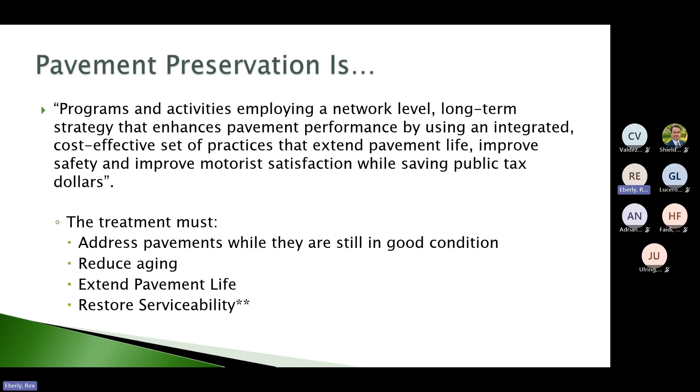The treatment we call a preservation treatment must address pavements while they're still in good condition, reduce aging, extend pavement life, and restore serviceability, make them a better road, make them drain, do whatever they need to do. I'll get on my little soapbox here. What I've learned in the past 4 years with NCPP and going out into the states is that addressing pavements while they're still in good condition...

My goal in this industry for the next 3 to 5 years I have left is I want to get people addressing pavements while they're in good condition, instead of waiting until, I'm sure you all have had to do a chip seal on a road and you're going, my goodness, this road is way worse than what a chip seal is going to fix. We're going to be back here in 2 years. I get that states have to do what they have to do because of budgets. But if we could have done the chip seal on that road 7 years earlier, then it truly would have been pavement preservation. So I'm off my soapbox.

So let's define that definition. Number one, the New Mexico Department of DOT, or any city, township, or county, they have a network of pavements, and preservation needs to cover that entire network. That's urban pavements, rural pavements, airports if they control the small airports in their network. If you're a city and you have alleys, parking lots, that's part of your network, and for your taxpayers, to do what you're supposed to do, you need to work it as a network. That's our asphalt, our concrete, and even our gravel or dirt roads, which, if I remember right from traveling New Mexico about 15 years ago, I think there were actually a few state routes that were still not paved, which is interesting.

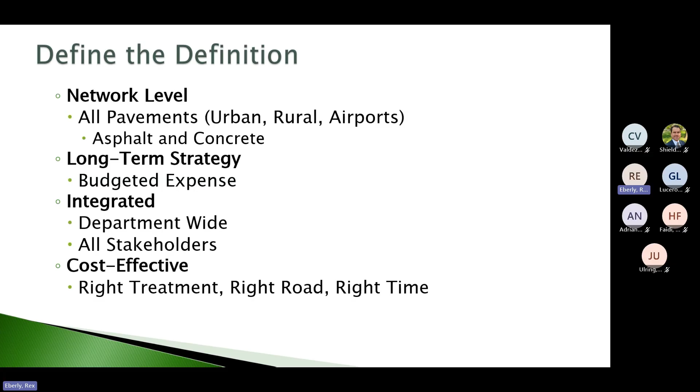And we want to keep the road users happy. Our families drive these roads, our taxpayers do, and it's our job to keep them happy.

We like to talk about a preservation mindset. Why do we need that preservation mindset? Well, number one, few agencies can anymore afford a strategy of build it, rehab it, and build it again, which is what we kind of used to do in a lot of parts of the country. It's called worst first, and we just let our roads deteriorate until the public says that's enough, and then we spend millions of dollars to put it back together again, and then we do that all over. We just let it deteriorate. Preservation says we're going to inject small amounts of money early and often into that road so that maybe we don't rehab it for 30 or 40 years. So that's one reason why we do that.

I don't know if you all know, but on your major New Mexico roadways, Federal Highway has performance thresholds that New Mexico DOT has to meet on rutting, cracking, and ride. If you're not meeting those performance thresholds, they can withhold money. I believe, and a lot of us believe, that without pavement preservation, it's going to be very hard to be able to afford to meet those thresholds long term.

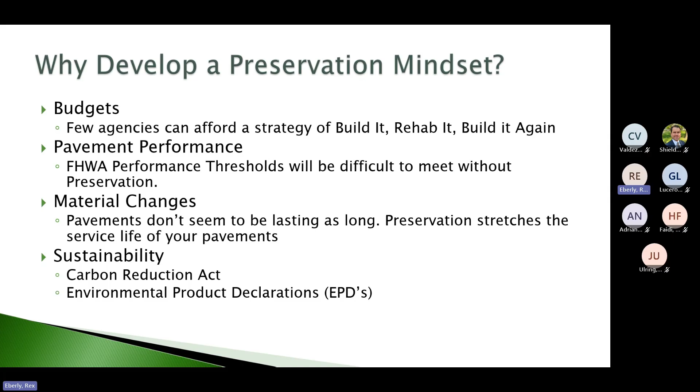So what we find is that the best materials are already in our roads. And I think New Mexico has done a great job of understanding that, because you all were one of the leaders in cold in place recycling. And I believe you're getting back into cold in place recycling using your RAP chips. You've been doing RAP cold mix for a long time. I think New Mexico really gets that. I work with Pennsylvania, and they're starting to figure it out. I mean, they're 30 years behind New Mexico.

So anyway, you've got a carbon reduction strategy, and I went through it, and it was kind of disappointing. There was no mention of pavement preservation in how to reduce carbon. It was all these little fancy things of electric vehicles and truck parking and all this, and I'm sure it's important, but the biggest thing the department does is build roads, and if we don't have to build roads as often because we're preserving them, I think we're going to reduce a bunch of carbon.

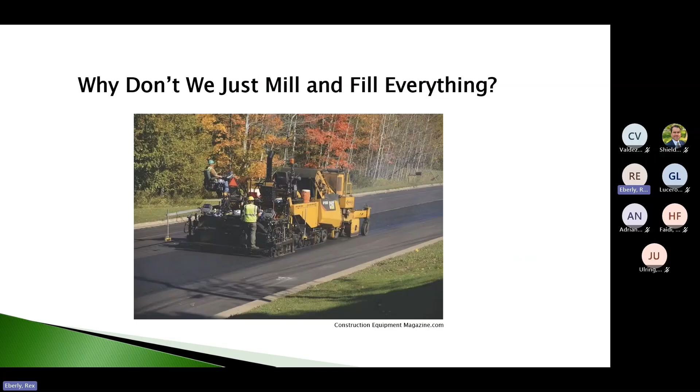So why don't we just mill and fill everything? That's easy. Our inspectors know how to do it. Our designers know how to design it. It's a lot easier than pavement preservation. And it works overlay. The hot mix works by heat. You just heat it up, you cool it down. You don't have all this chemical reaction stuff.

Well, we don't do that because we can't afford to. Let me give you two examples. State example one is what we call a worst-first, heavy-overlay-centric DOT. They didn't do a lot of pavement preservation over the last 15 years. The interesting thing is earlier than that, they were a big adopter of pavement preservation. For political reasons, we'll leave it at that, they got away from it.

So in 2023, this agency spent 1.6 billion with a B for roadway preservation activities. However, their roadway preservation activities aren't chip seal, crack seal, slurry seal. They are reconstruction, improvements, capital preventive maintenance, which for them is at least 1.5 inches or thicker mill and fill, and freeway and non-freeway resurfacing.

So out of their 32,000 lane mile network, a large network, at $1.6 billion they were only able to cover 2,138 lane miles, or about 6% of the network. If you think about it another way, if they continue that and only do 2,100 lane miles of their 32,000 lane mile system, it's going to take them 15 years to get back to doing something to these roads.

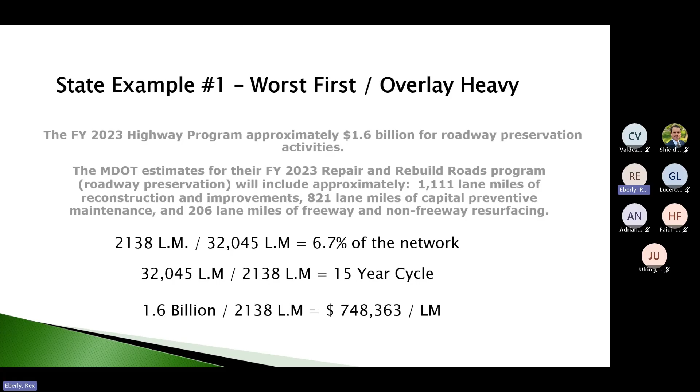Let's look at another state, different state. The last one was in lane miles, so 12 foot wide by a mile. This state talks about roadbed miles, so it's a little harder to judge, but they did 7,100 roadbed miles of their 35,000 roadbed mile network. This is a huge state.

That 7,100 miles included chip seal, microsurfacing, thin lift overlays, and some hot mix, mill and fill, heavy mill and fill. That's fine, you got to do it sometime. So they were able to touch 20% of their network, which is a 5-year cycle, which is perfect. Their mix of treatments is: they call chip seal coat, 60% seal coat, 20% paving, and 20% other stuff, fog seals, microsurfacings, ultra thin, different other processes. So they're on a 5-year cycle.

One of the reasons they can do this: they are just like New Mexico, they self-perform their chip seal. This state is Pennsylvania. Last year, they put down 21 million gallons of asphalt emulsion for their chip seal program, self-done. And I think this year is supposed to be 22 to 23. So a very healthy pavement preservation program, and their roads show it.

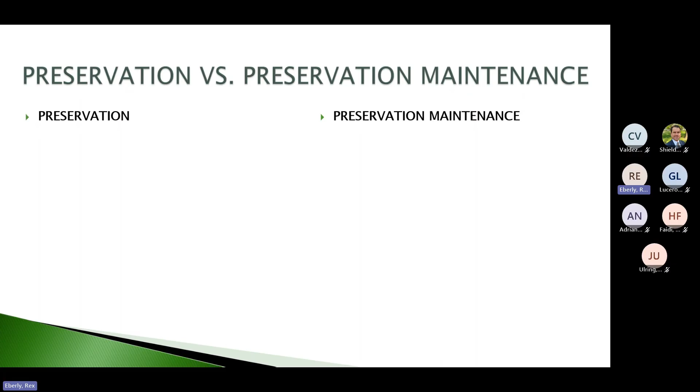So we need a balanced approach, and we want to plan these lower cost treatments to extend remaining service life. I want to talk about the difference between preservation versus preservation maintenance. Preservation, to me, is what we don't do enough of as an industry. That is placing a treatment before it looks like you need it. Why are you covering that road? Well, because it's oxidizing as we speak.

So preservation is preserving the surface and extending that service life, how long it's going to last. Preservation maintenance is when we have some surface defects - some raveling, cracking, rutting, whatever - but we still have a good pavement. We need to repair those surface defects while preserving the surface and extending that remaining service life.

Preservation really is time-based. We know that pavement's going to oxidize. Your pavement engineers know how long it's going to take till it starts cracking. None of that should be a surprise to us. So we need to time those initial preservation treatments to slow that aging. I like to say early and often.

Preservation maintenance obviously has a time component, but there's a condition component too - you can't fill cracks if there's no cracks. But we want to place treatment as early as possible when defects occur. The best time to fill cracks is when they appear, not when you have miles and miles of cracks that you have to put out a construction project to fill. We want to add service life with the preservation and stop the deterioration.

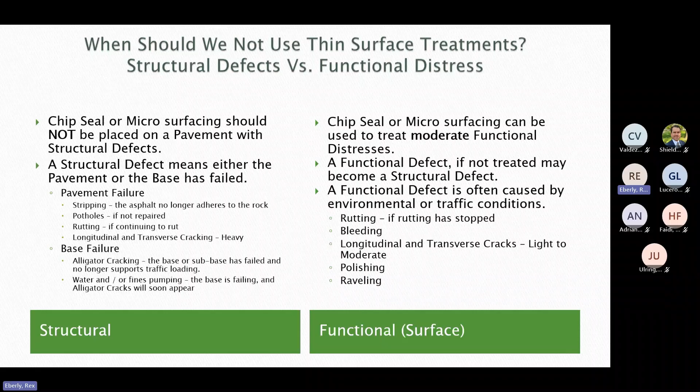So again, if we're doing chip seal on those, we're probably just doing it as a stopgap measure to buy some time - we're not really preserving that pavement. We do what we have to do, but then we're doing maintenance, reactive maintenance. Preservation is proactive and maintenance is reactive. So anyway, those are when we should and should not do preservation.

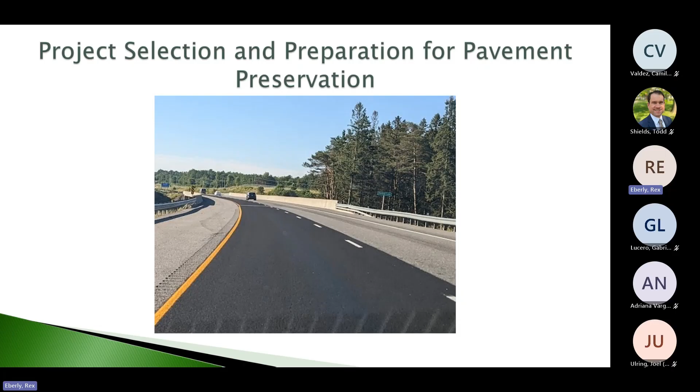So, project selection and preparation for pavement preservation -- this is pretty much the same for every preservation process we do. I hope I've got some folks in the room or listening in who choose your projects; I know for the guys in the field, you just go where they tell you to go and do what you've got to do. But if your folks are thinking about what to do preservation on and what process to choose, first ask: is it able to be preserved, and is the intent preservation? Are we just protecting a fairly new pavement in very good condition to keep it in that condition? That's preservation -- is that our intent?

Or is this preservation maintenance, where we've got some surface defects that we need to take care of? Again, if we have structural defects -- whether in the asphalt layer, the mid layers, or the bottom layer, or it could just be that you've got 22 years of chip seals every 4 years and it's a gooey mess -- that's a structural issue. That's the pavement's issue.

If we have those issues, our preservation isn't really preservation anymore, but that doesn't mean we don't do the treatment—it's just not preservation. So do I have any untreated light to moderate cracking? We'll talk about crack filling and sealing as we go. Do I have isolated base repairs to think about? Sometimes when base repairs get to be more than 20% of the pavement, preservation may not be financially feasible—you've got too many structural issues and might have to do something else.

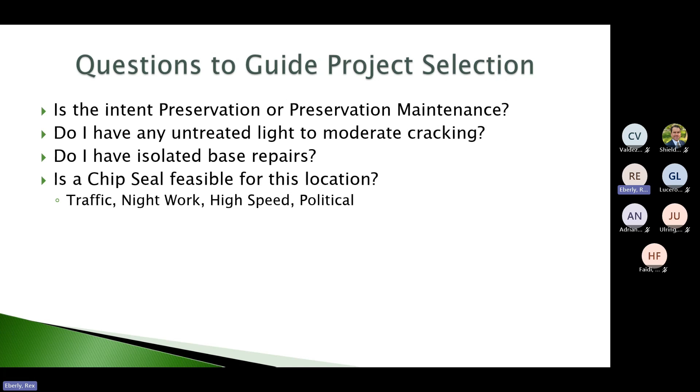So is a chip seal the right thing for the road? Sometimes night work isn't great for chip seal, high traffic isn't great for chip seal, high speed isn't either, and then like I said, political concerns.

If we're doing preservation maintenance, what are the primary and secondary distresses? If your designer thinks about that—say you've got oxidation and early cracking—then maybe all we need is a crack treatment and a fog seal. Versus rutting and heavy oxidation, where a microsurfacing might take care of that, or we might have to mill before we do that chip seal. So think about those as a designer.

How quickly is the deterioration happening? One issue with pavement preservation is that deterioration occurs fairly rapidly at times. If a DOT takes three years, say, to go from 'we need to crack seal Route 3' to actually putting out the project, well, Route 3 no longer needs a crack seal—it's well past that and needs something else. We need to understand how quickly deterioration is happening and plan for it, so we don't come out to do a chip seal when really what we need is a mill and fill.

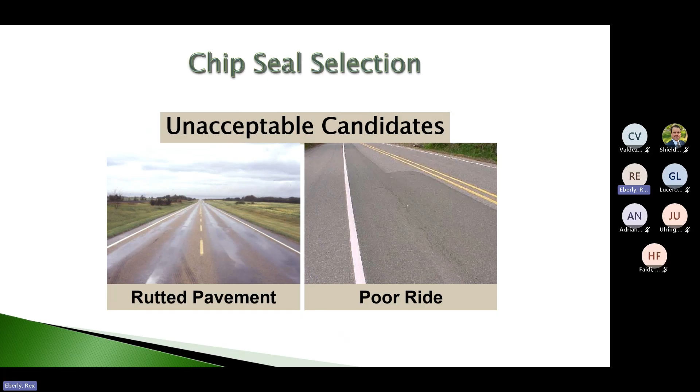Now, we could go in and mill this, possibly, or do a rut fill with microsurfacing and then chip it. But if we don't repair those ruts, a chip seal is probably not the best candidate. And again, poor ride—we're doing a thin asphalt membrane with a single layer of rock. If that's a rough riding road before you start, it's going to be a rough riding road when you're done.

We talk about unacceptable, untreated cracks over a quarter inch, and what we're saying is you do need to treat those cracks that are a quarter inch wide and wider.

The asphalt cement or asphalt emulsion will not penetrate and will not fill or seal that crack when they're that wide, unless you're doing a scrub seal and using some other materials.

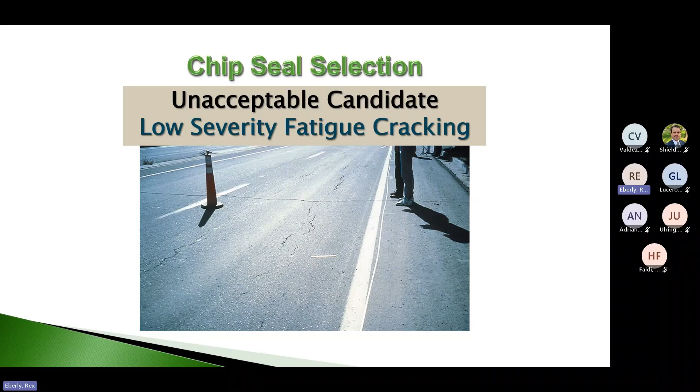So we talk about preparation in early stage and final stage. Final stage is when your team shows up on the job with the chip spreader, the distributor, ready to go to work. Well before that, we like to see the crack treatments done, if possible, 30 days or more before you start the chip seal. This allows that crack treatment, whatever product it is, to cure. If they've gotten a little high, that allows traffic to compact it, knead it down a little bit, make sure it's stuck before we go over with a chip seal.

Same thing with our patches - we want to get it patched well out ahead. Any leveling or full depth repairs. You all don't think you have to worry too much about tree trimming, but in some parts of the country, they've got to trim trees before they can get the equipment down the road. So that's part of it.

Herbicide treatment, if you've got grass growing, especially if you're going to do shoulders and you've got grass and stuff growing in those cracks, let's treat that and kill it, because that emulsion acts like a fertilizer, and that grass in that crack's going to be happy when you're done.

Then we can also do edge milling if we have curb, and micro milling. So those are things that may need to be done depending on the roadway, but they need to be done out around 30 days ahead of when you all show up to do the chip seal.

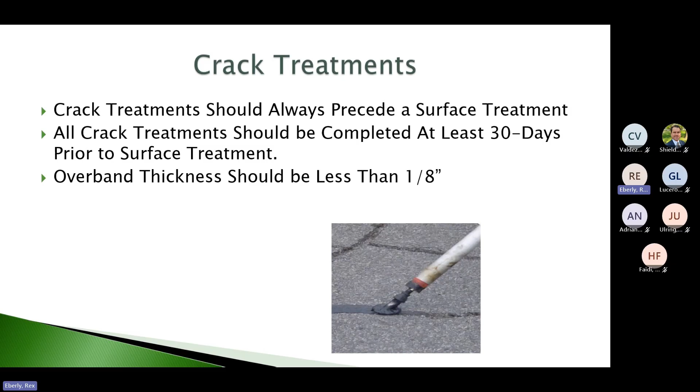Again, we talk about completing those at least 30 days prior. We don't want a thick overband. The overband, like you see they're putting there with the disc, should be less than 1/8 of an inch. If we're doing mastic, which is a hot applied heavier crack filler used in a lot of parts of the country, and can do very wide cracks or even patches, those need to be flush or slightly below the surface. If we're doing leveling and full depth repairs, again, we want those completed at least 30 days prior.

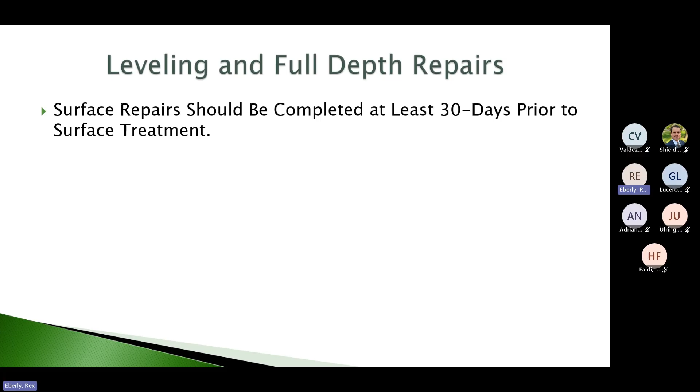There's a couple reasons for that. Number one, if they're brand new, there can be some off-gassing of some of the light ends coming out, especially if it's a cold mix patch. And so that could cause your chip seal emulsion not to adhere. Also, new hot mix patches tend to be coarse before they've gotten a lot of traffic, and they will suck up a lot of the emulsion. So if you don't pre-fog those new patches, say newer than 30 days, newer than 60 days, you can have failures because you don't have enough asphalt emulsion to hold the chip there.

Always, when you're patching, keep them flush or slightly below the surface. And the ride quality of your leveling and patches must equal the desired ride quality of the finished pavement, because your chip seal is not going to fix a bump. Chip seal and microsurfacing may level slight depressions, but a bump is always going to be a bump.

Minnesota DOT does this. Other parts of the country are starting to do micro profile milling, which you can see in that photo in the bottom right, the difference. There's a fine milled surface that a lot of states have gone to for everything, but a micro milled surface is very fine. It does not affect traffic, it does not affect motorcycles, and it doesn't affect the application of a preservation product, other than it helps it adhere better. It gets rid of some of the rutting, gets rid of some of the cracking. So a lot of states are starting to do that micro mill ahead of a preservation process.

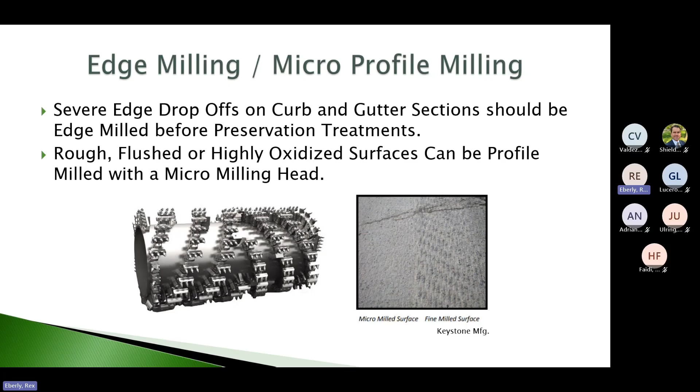Okay, we're finally up to what you guys wanted to talk about, chip seal. So why chip seal? Well, I'm a microsurfacing slurry seal guy from a long way back, but I have to admit that there is no better preservation treatment than a chip seal. The combination of liquid asphalt sprayed on the road, able to get into the grooves and the oxidized crevices and cracks, really waterproofs that pavement, along with a single size chip on top of it to protect that asphalt from wear by traffic, is a fantastic treatment.

It does what we need for preservation. It keeps the oxidation from the sun, the water, and the chemicals off of that pavement, and it keeps the water off the top of the pavement and out of any cracks. So, very important tool. It can also be used as an effective form of minor rehabilitation, providing a great new wearing course, excellent surface friction, increasing our friction numbers up above 40. I like it as that sacrificial wearing course.

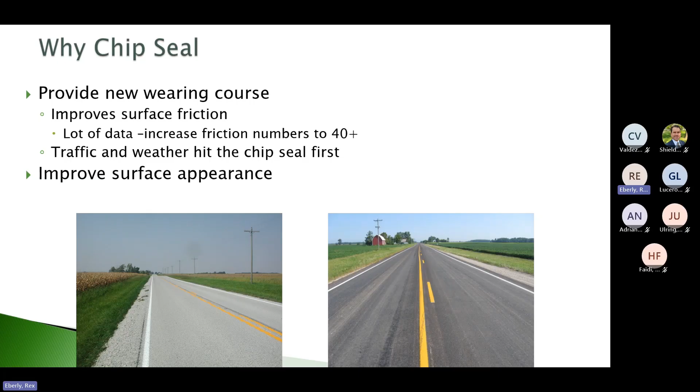Traffic and weather hit that chip seal first, and protect the expensive pavement underneath it. Usually they improve the surface appearance, especially when you're fog sealing after—I'm really glad that you're doing that. Again, remember, chip seal does not add structure. If you've got a bad road before, you're going to have a bad road when you're done. Didn't fix anything. Lipstick on a pig.

Again, sometimes we have to do it, I get that. But so again, we kind of talked about that. A chip seal, also called seal coat, is a single layer of asphalt binder, liquid asphalt, that is covered by embedded aggregate—very important, one stone thick—whose primary purpose is to seal the fine cracks in an underlying pavement surface and prevent water intrusion into the pavement, into the base, and into the subgrade.

The main advantages include improved skid resistance, cost effectiveness—especially when the department is self-performing, very cost effective—and good durability. Chip seals wear well and have long service lives. We've seen chip seals out there that have lasted 18 years if done well. And it's pretty easy to do. I mean, yeah, we're spilling oil, we're spilling rock, but if we do it right, it's not that difficult. There's not that much testing, not that much preparation, so it's just a really good way to maintain our pavements.

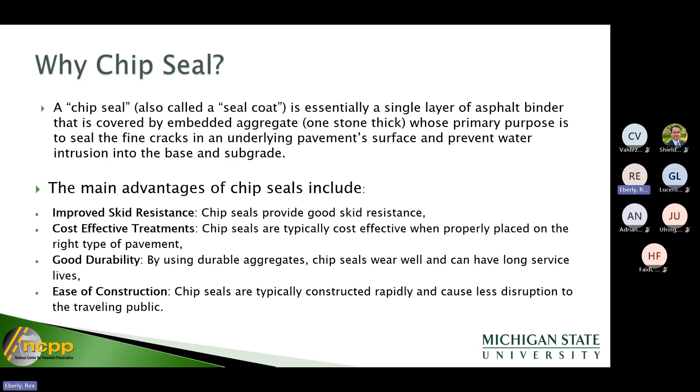Everything we're going to talk about, the best practices for chip seal, really holds true for the RAP chip seal that you're doing, except you have some extra steps in the crushing, fractionating, and treatment of your RAP stockpiles. This is one place where I'm hoping to learn from you all, because I've got some experience in Pennsylvania and some in Arizona, and you guys might tell me some things you do that help with these issues. But for the most part, there's no difference between a chip seal with good solid granite chips versus a RAP chip seal, as far as best practices. So we're going to talk about that.

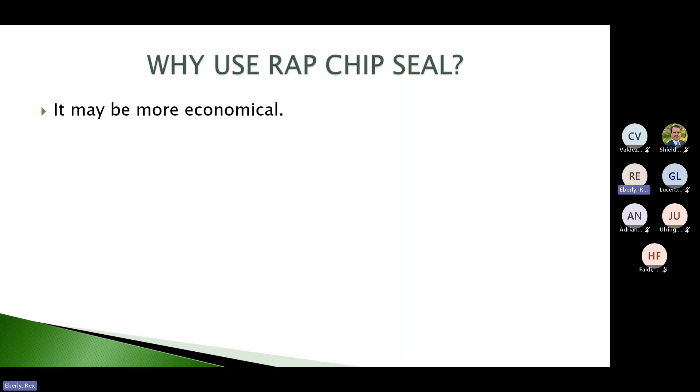Why would we use the RAP chip seal? Well, it can be more economical. It's not always more economical. There are some times when the fractionation, the keeping it clean, keeping it dry in some cases, damp in others, costs more than it would just to go buy good chips. But there are states and agencies that just like the fact that they're using RAP.

This is why you all use it. You have thousands of tons of asphalt milling stockpiled around the state. What else are you going to do with them? I know New Mexico does a lot with them. You do cold patch, you have contractors go around and make RAP cold patch, you put it in your shoulders, you use it, you'll sell it to the cities, you do RAP chip seal, and that's fantastic. A lot of states in the country, especially in urban areas, you know what they do with RAP? They stack it up and just keep stacking and stacking, and that gets to be a huge issue.

A RAP chip seal at times can perform better than a standard chip seal. Sometimes not, sometimes it does. They seem to be self-healing. They seem to handle traffic pretty well, as long as we get that RAP clean enough that everything's sticking. It's sustainable, right? We're reusing something that we already paid for, and that's really important for the department.

Why not use a RAP chip seal? We're still learning. Again, you all are probably ahead of a lot of the country, but we're still learning about RAP and how it works in emulsion-based systems. And actually, I'll back this up—I think Adriana could probably talk for hours—we're still learning about how RAP works in a hot mix situation, not just an emulsion-based system. So we're all test pilots here, and we're starting to use RAP in microsurfacing.

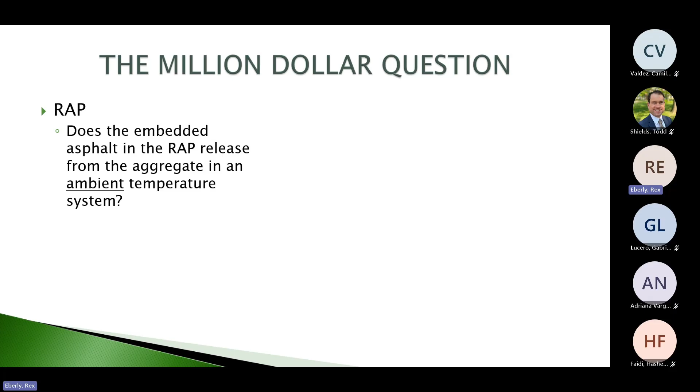So the million dollar question I like to think about with RAP, and I think scientists are still studying this, is especially in a chip seal or microsurfacing, does the embedded asphalt in the RAP release from the aggregate in an ambient temperature system? Are we really getting any bang for that asphalt in the RAP, or are we just getting some black rock? There's a couple articles about that in Asphalt magazine, and I know NCAT is studying that.

Again, I'm not saying any of this to say don't use RAP in a chip seal. I'm just saying there's things we don't know yet. We really don't know if using a certain asphalt emulsion will liven up some of that RAP and make it a little more flexible, or if it's just a black rock. We're still learning, and it's great—I'm very happy to be in this time where we're learning this stuff.

Every best practice that applies to a chip seal applies to a RAP chip seal: clean stone, since even though your stone is RAP, too much dust and it won't stick. Clean pavement, consistent shot rate, quick application of stone. Don't over apply stone, roll before the emulsion breaks, and aim for 70% stone embedment. The big change with RAP is extreme stockpile management.

Before I go into the rest of the best practices, Adriana, you were out with those folks on their RAP chip seals. Do you have anything to add about how you were seeing the RAP work in their chip seals as a scientist?

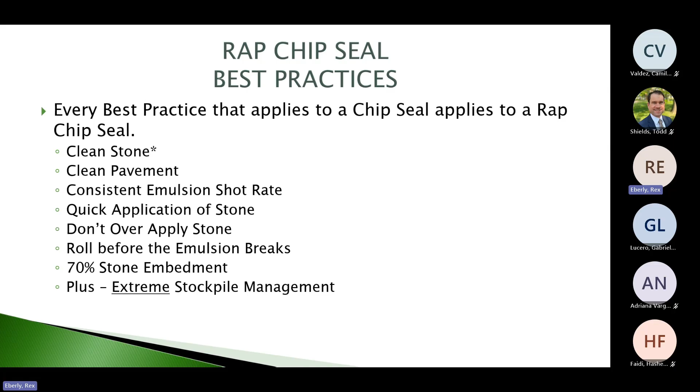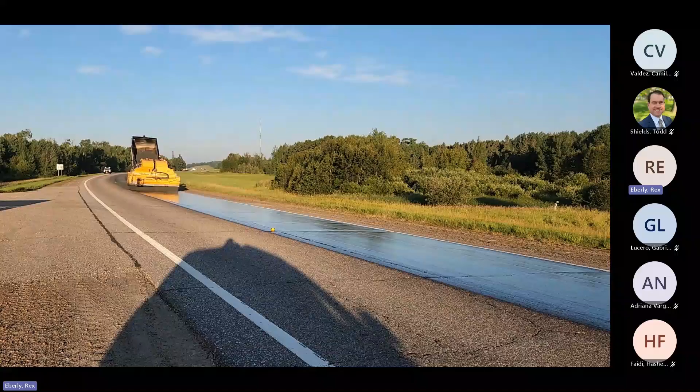If there's anybody who really hasn't been out on a chip seal - I didn't get a shot of the distributor here, but this is up in Minnesota, on Joel's project about this time last year. We've got that membrane of oil, we've got some cracks that are probably wider than we would want, but we're doing a good job of spreading that chip there.

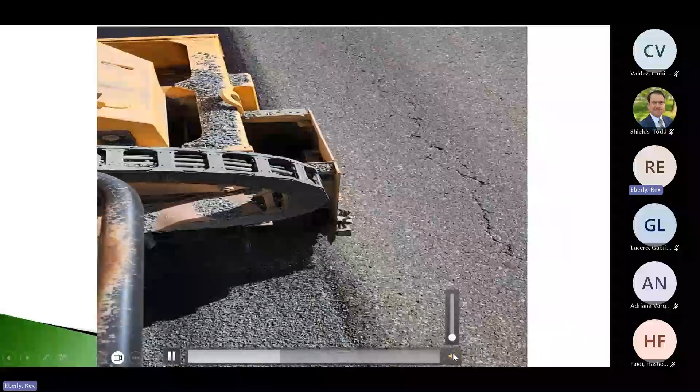Another shot from the chip box, how that thing operates. And one more shot here - again, they're right where they want to be with that distributor, nice straight line. To me, that's kind of what we're looking for, whether we're RAP or standard chip seal.

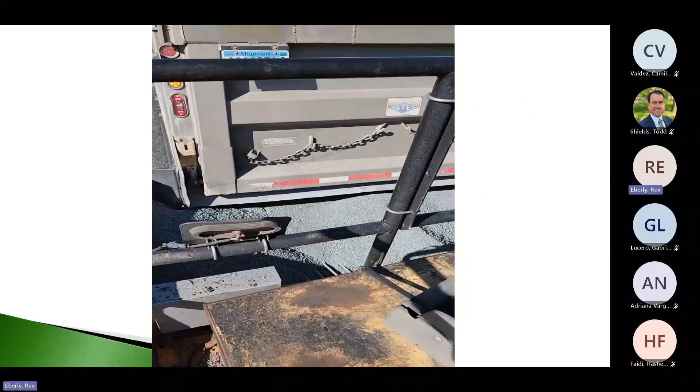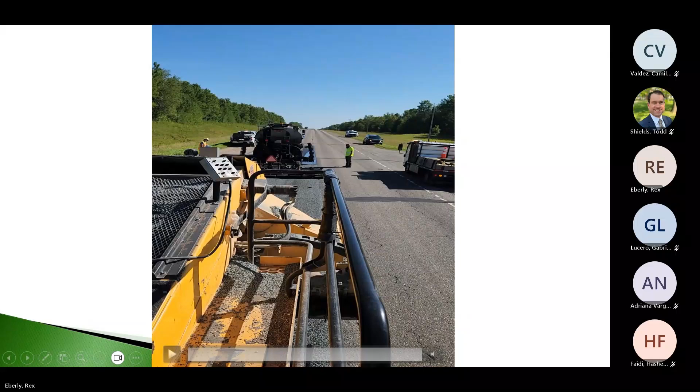Oh, I got one more. I think a lot of people forget what a ballet it is between the truck drivers and the chipper. So we've backed up to that truck - this is how they do it, other folks do it differently. Hooked on, you can see down there's where we've been working before, you can see the rollers up at top, right where they should be. And we've gotten going. So like I say, there's other ways to hook up, other folks do it differently, but that's just to get the juices going.

So everything we're going to talk about from now on through best practices is really aimed at getting the correct embedment of the chip into the asphalt membrane. And that's exactly what we're doing here - we are spraying a membrane of asphalt, whether we're using hot asphalt or emulsion.

We're going to spread a membrane of asphalt designed so that when our single chip goes into it, about 70% of that chip is going to be embedded in that membrane once we've rolled it, swept it, and had a few days of traffic on it. Once we're using this chip seal, we'd like to see at least 55 to 70% of that chip embedded in the asphalt membrane.

Everything we do for best practices makes sure we get that embedment of the chip. Obviously, if we don't have that chip embedded far enough in the asphalt, that chip's going to fall out. It's going to get popped out, traffic's going to get it, or it won't even last the brooming and the rolling.

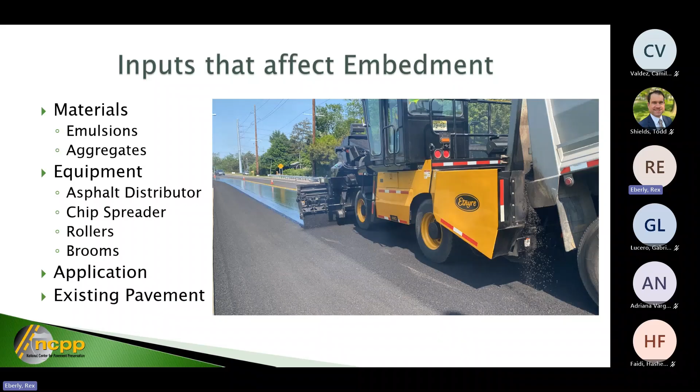And then of course our existing pavement. That's part of what we'll talk about, how we look at our existing pavement and make determinations of whether we need more or less asphalt, and more or less stone. All of those come together to affect the embedment.

We'll talk a little bit about asphalt emulsions. Before I go, I forgot to ask this, I'm pretty sure about it, but are you guys using a CRS-2P? Is that what you're using for your emulsion? HFE-100P. Oh, you're doing a high float. Okay, high float, I think I've got a slide on that. So good, okay, that's great. I apologize, I should have got that out earlier.

We're going to coat those particles with a solution and then add some more water. The reason we do that is so those little particles sit in the tank and bounce around off each other, not come together and make a big ball of goo. Then we're able to pump those little particles into a tanker, and they go down the road a few hundred miles at 70 miles an hour, happily bouncing apart.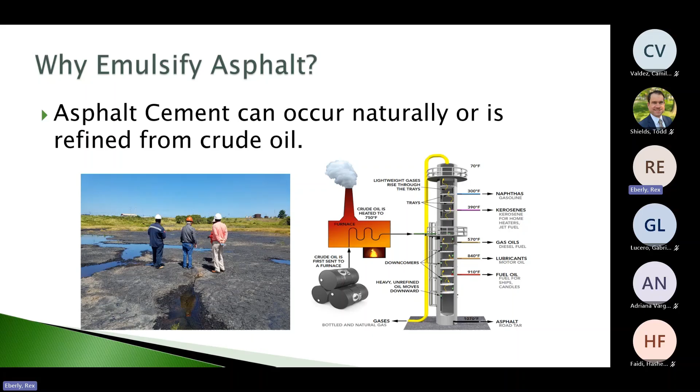Again, an emulsion is a homogeneous mixture. That means it's not layered - it's the same, everything's mixed well. It's a mixture of two immiscible liquids. Immiscible means they're not supposed to be mixed - oil and water don't mix. But we've been able to mix those together so that they stay stable.

We do that by taking that asphalt cement and putting it through a mill, which slices it up into those very small particles. At the same time, we inject water and a soap, and maybe some latex or other chemicals, acids or base to change the pH. What we're doing is grinding up that asphalt into little particles, then coating each asphalt particle with some of this soap solution, and putting it in a storage container. Pretty simple - you can see that little picture there, and then the chemistry.

If you look here, those little red dots are the emulsifier, and they've attached themselves to the asphalt particle. In this case, it's a positive cationic emulsion, which gives that asphalt a positive charge. Your HFS, we'll talk about in a minute, is not positive - it's negative, but that's okay.

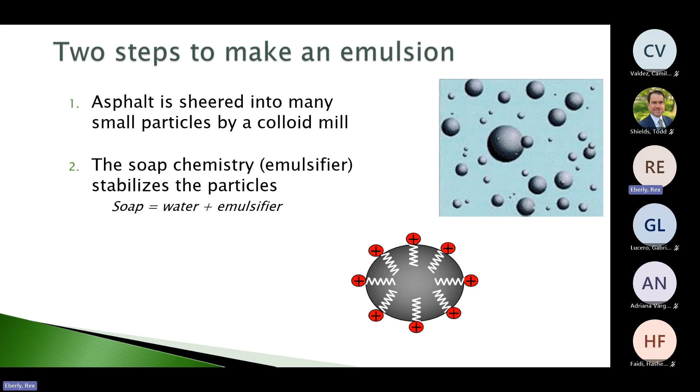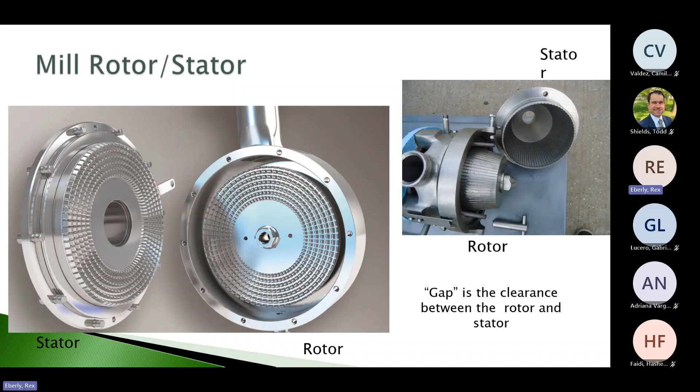An emulsion mill - here's kind of what it looks like. They're very small, not a huge deal. A company I used to work for had an emulsion plant inside a 40-foot container - other than tanks, that's all we needed. Here's the mill where they slice that up, and you'll see those teeth on the mill, and that rotor rotates around the stator at sometimes about 12,500 RPM, just taking that asphalt and breaking it down into really fine particles.

The materials are injected into that mill - we have emulsifiers, the soap, and different additives that go into that emulsion to prevent separation. That gives its curing characteristics, all different things. So we can take different blends of asphalt cement that come out of the ground, and then modify those differently with different characteristics.

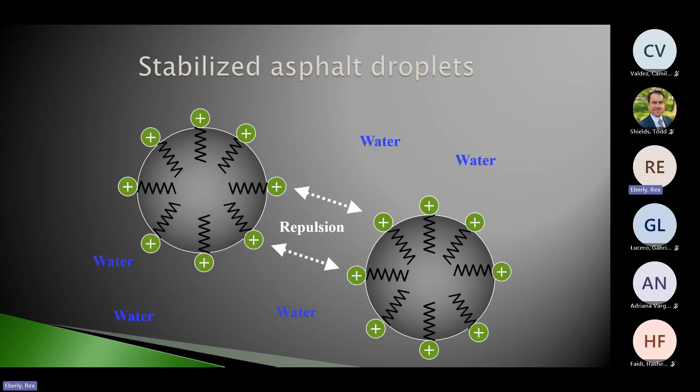That's the repulsion we're talking about. That's how those little particles bounce around, because if you remember playing with magnets as a kid, opposites attract and same charges repel. So if all those particles have the same charge, positive or negative, they're just going to bounce around in the tank and not come together.

In the case of a cationic emulsion, if you take that piece of rock, it's pretty much neutral, no charge, a little positive, a little negative, and you've got that highly positive asphalt particle. So it's going to be attracted to that rock, and when you drop that chip into the asphalt, it automatically starts getting attracted, and that asphalt cement moves and grabs onto the rock.

I should have flipped this picture over. I need to do that someday. I always forget to do that.

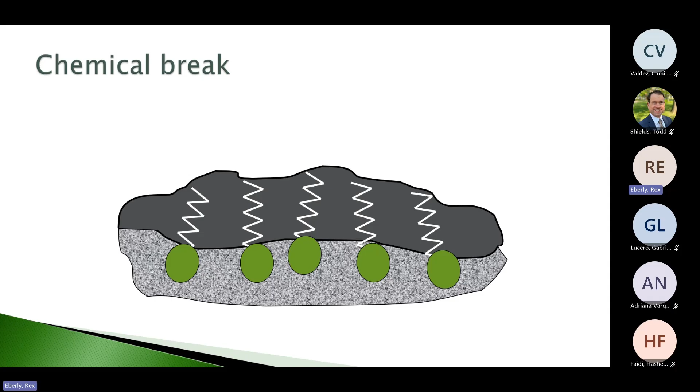Anyway, so that asphalt grabs onto that rock, and then it lets the water go, and you get your break, your set, and your cure of your chip seal. So that's how the emulsion works.

Just a second, let me make sure I've got the high float. Darn it, I don't, but I'll walk us through the high float. So a lot of parts of the country, the chip seal emulsion is a CRS-2P, and a lot of this is the same with your high float. Tell me again your designation of your high float.

HFE 100P. Okay, so you've changed it. It's probably an HFRS, an HFRS-2P. So okay, CRS-2P - that C, I know the state has its own designation, but...

Chemically, this emulsion has a positive charge. It's cationic. Your HFRS - if this just had RS, then we know that it's anionic. It has a negative charge.

What that means is really important for you distributor operators: if that distributor is spraying your HFRS, and you go spray something else that's a CSS or a CRS, you need to clean that distributor completely, or you're going to have the positive and the negative of those two emulsions, and you'll end up with a ball of goo in the distributor. So that's why that C is always cationic, positive. If there's no C, then it's a negative emulsion.

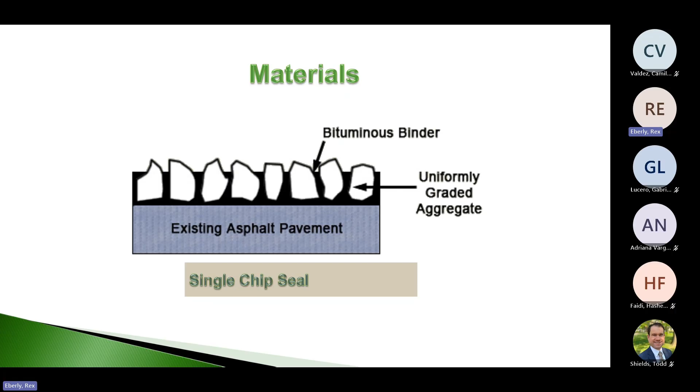So again, let's talk about those materials a little more. We've got our existing asphalt pavement, and we've got that asphalt membrane that we're spraying on, and then we're dropping some uniformly graded chips into it. This is where it's really important that we're getting that RAP fractionated and blended correctly.

With aggregates, we either have single size aggregates or dense graded aggregates. What we see in the picture, what we mean by dense graded is we've got little bitty rocks, medium sized rocks, and big rocks. Maybe all of our rocks in this dense grade are smaller than 3/8 inch. So yeah, we've got 3/8 inch chips in there, but we've got number 50s, we've got number 8s, we've got all different sizes.

If you see that, why that's not good in that asphalt membrane is we have little bitty chips that have fallen in, and they're completely covered with asphalt. So they're actually pushing that asphalt up higher on the regular size chips. And then we've got chips laying on top of other chips that aren't embedded at all. So instead of being embedded 55, 60%, they're embedded 20%. So they're absolutely not going to stick. And then you've got everything in between.

So what we really need to have a good chip seal is a single size aggregate, as close to single size as we can get. And that's one place we kind of get into trouble with RAP, is we don't get it to that single size, and we get something going on like that dense graded, and we cause problems with our chip seal.

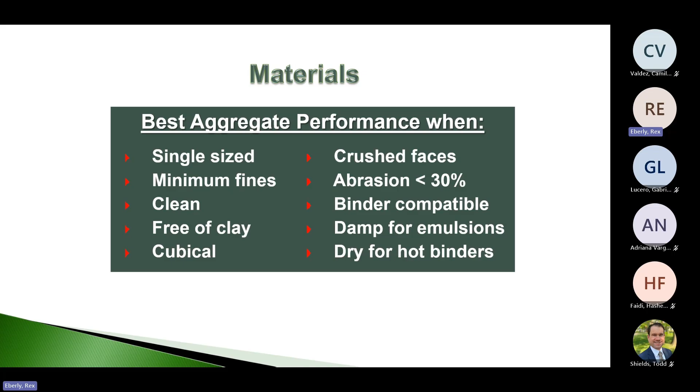Normally aggregate wants to be damp for emulsions, but if we're using hot binders, hot asphalt, it needs to be bone dry so that we don't make steam when that wet rock hits that hot asphalt. So those are the qualities of the asphalt concrete chips that we want to make a good chip seal.

So, RAP preparation and stockpile. Hopefully your folks know where your RAP came from. You're selecting RAP piles that haven't been just trash piles, that have come from hopefully a single source project where the donor road, you knew what it was, you knew what was in there.

Watch for dirt, trash. Hopefully the contractors haven't been, or you guys haven't been cleaning out your distributors into it, or putting other junk in that pile, cones, whatever stuff.

Most folks are fractionating or crushing and screening that RAP pretty quickly before it's used on the chip seal. We can't process RAP correctly and then store it for long periods of time without rescreening. When we make that RAP chip, a lot of times we're making a 3/8 inch chip and a type 2 slurry aggregate. Usually that comes off the screen pretty well, or that slurry aggregate might be able to use in your cold mix and stuff like that.

We find that we may need to double screen or even light wash to remove coated fines if there's so much fines in there that we're not getting adhesion to the asphalt or to the chip particle.

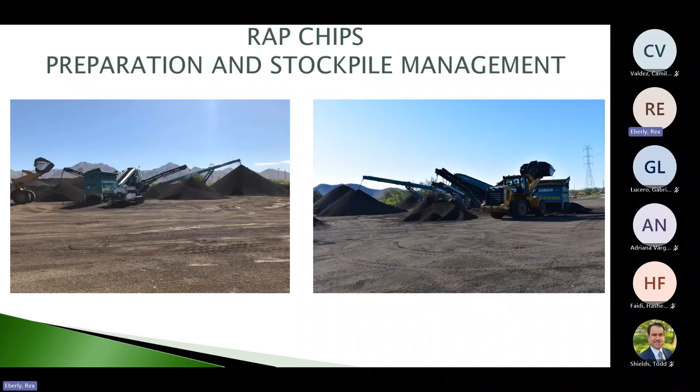This is our yard in Arizona with our crusher screener unit. This one's making slurry aggregate and chip aggregate. You can also blend, and then I think there's actually an even finer set in here that they're taking and they're selling it back to the hot mix people, and they'll put that in their hot mix. So they're using the whole pile. Just a close up.

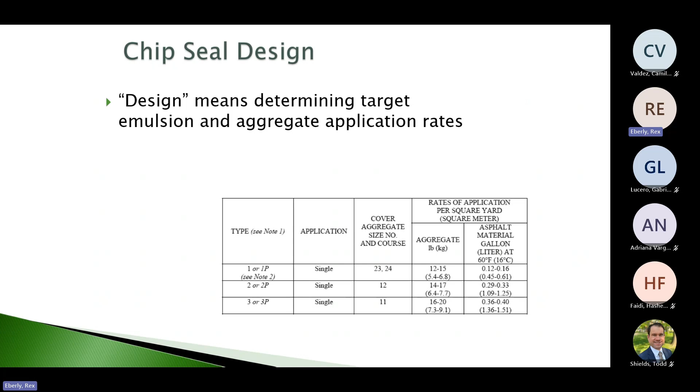So there are chip seal designs out there and I don't go too deep into them. There's actually 3 different chip seal designs, and what a design means is determining the target emulsion and then the target aggregate application rate. We're looking at the size of the aggregate, the test results of the aggregate. Is it cubical? Is it not? Is it flat and elongated? Is it not? We're looking at the emulsion, we're looking at the road, we're looking at how dry or how much traffic the road covers, and we put all that into a computer program, and it spits out that we want 0.28 gallons per square yard and 26 pounds per square yard of aggregate or whatever.

We always need to remember, and we'll talk about this later, but if we're doing a design like that, or we're just using tribal knowledge of what's worked in this district with this chip, with this asphalt emulsion, either way, we always have to remember that this is a starting point, and that the road changes sometimes every quarter mile, and the temperature changes, and the humidity changes, and the traffic in that area changes. And so we need to be flexible. I think that's one thing that gets difficult for inspectors of chip seal projects to understand is yeah, the plans or the hope is to have a known application rate, but that's going to change as the road changes and the day changes, and the same with the aggregates. So that's kind of why we don't go too deep into chip seal design.

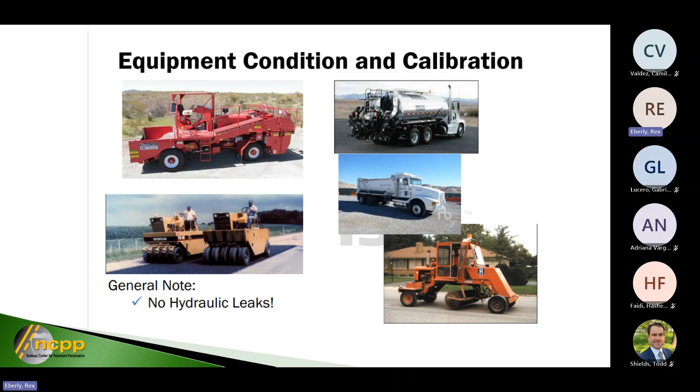I think we'll go into equipment condition and calibration now. Now we're getting into the best practices stuff. So asphalt distributor checklist, a nice brand new Bearcat here. Are you guys running Bearcat or Etnyre normally? Or do you have a little bit of both? Oh, it's that one. Okay, that's interesting.

Most times we get west of the Rockies, it's all Bearcat. And I grew up around Etnyre, so I'm happy about that. But they're all the same, they're made by the same company now. It's just a regional thing. So, okay, great. So the distributor checklist, and anymore, there aren't many distributors out there that don't meet all of these requirements, but sometimes a contractor will show up and there's things that aren't working and they need to be working.

That distributor needs to be computerized. Used to be, we had to go out and nail the speed, know exactly the width, know everything about it, the exact pump pressure, and then hope we were right. Now with computers, we've got a much better shot at being correct.

It needs to be able to circulate between the tank and the bar. We need working radar on the distributor. There are some brands that use track speed and distance off the differential, but we need a way to track speed and distance on that distributor.

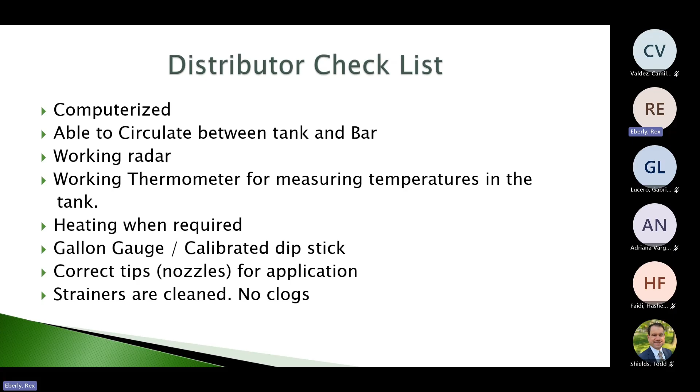We need to check the calibration of the distributor to make sure the computer rate matches what's going on the ground. So if we say we're pumping 300 gallons per minute, or 100 gallons per minute, or whatever it is, that's what we're actually pumping.

We also need to make sure we're getting the right amount of asphalt all the way across the lane width, because we need a consistent membrane across the lane. We need enough material to retain the chip and assure we've got a good bond for the paving surface. That's why calibration is important.

Some really basic stuff that we talk about, but we talk about it because we'll come out on a project and see that it's not correct. That's why these are called best practices.

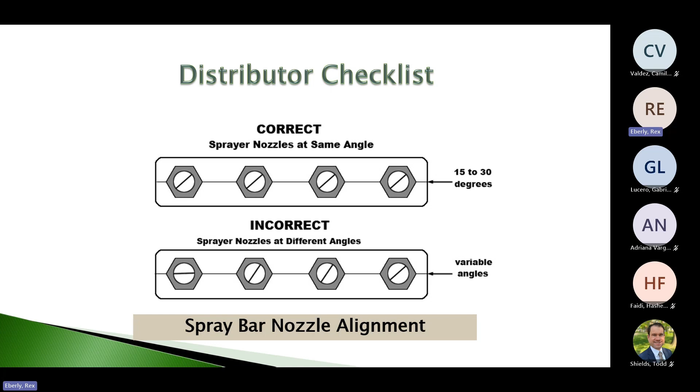Best practice number one: spray nozzles at the same angle. Ours is a 30-degree angle. Other distributors have different angles, but unless you turn the end nozzle at 90 degrees, we want all of those at the manufacturer's angle of 30 degrees. We do not want variable angles all over the place.

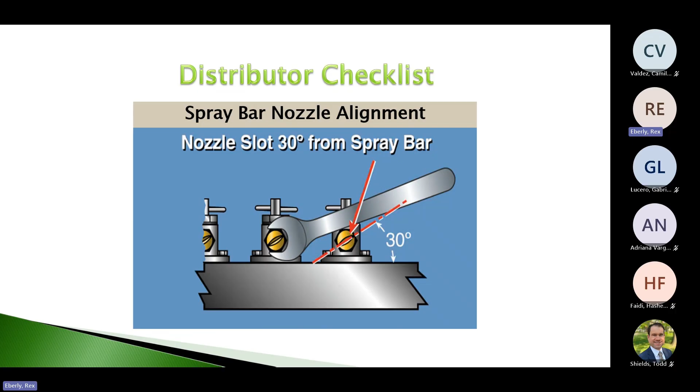Your wrench takes care of that - you turn it, you hit the other one, you're at 30 degrees. We're wanting that triple lap coverage.

The next thing to check on that distributor is the height of the spray bar - is it at the right height to give us that triple lap? With nozzles on 4-inch centers, material sprayed from each nozzle overlaps 2 other sprays. Generally these are designed so that plus or minus 12-inch height is where we're going to be. We say plus or minus because the height of a bar on a fully loaded distributor is going to be different than an almost empty distributor.

That difference isn't big enough to matter. But if you want to check exactly what your distributor height needs to be, open every 3rd nozzle. So open a nozzle, close the next 2, open the next, do a test shot, and adjust the height of that bar so those 2 fans hit at the same place on the road. If they overlap, you're too high. If they don't touch, you're too low.

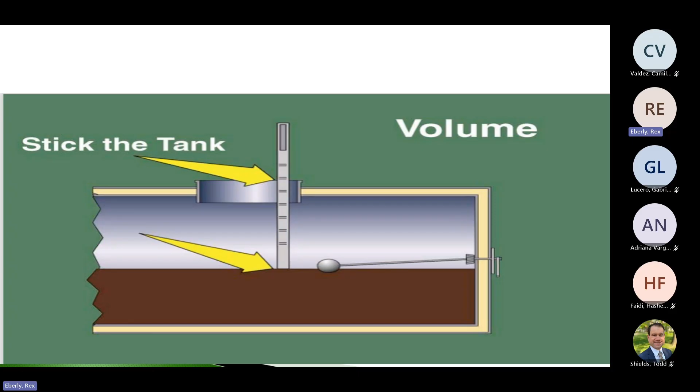We understand that by checking the volume of the tank. Yes, there's a gallon gauge on the side of the tank, but it's usually not accurate enough. So we use a calibrated dip stick to check that. These dip sticks drop down to the level of the asphalt, and there's a point on the manhole - each distributor or model is a little different where you mark that - but that will read directly and tell you how many gallons are in the distributor. It needs to be level as much as possible before we do that.

The way we make sure our computer is set right is we do a test shot. We get a weight and/or volume at the beginning. We shoot 1,000 feet at 12 foot wide, and determine what the square yards is. It's very basic. Then we measure the amount on the back end, and we tell ourselves, okay, we wanted 0.28 gallon per square yard, and we got 0.275. Let's go to work, we're good.

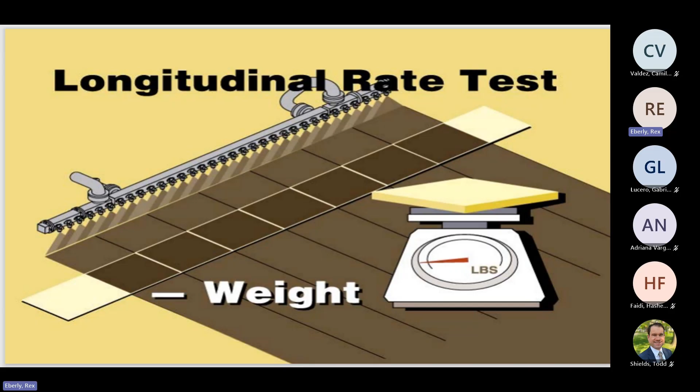That's the longitudinal rate test, meaning the bar is reading correctly. But we also have a transverse rate test that checks if we're the same all the way across the bar. We want a monolithic asphalt membrane across the roadway, so we get the right embedment all the way across. We need to make sure that first set of nozzles is spraying correctly, just like the middle set and the other end set. That's the next thing for us to check.

Nozzle selection depends on the application rate, the viscosity, the pump speed - hopefully you've got the slide rule or the Etnyre app that helps you choose the right nozzle. It does make a difference. You also need to be changing nozzles between a tack job, a chip job, a fog job, because they can and probably are all different nozzles.

We need to think about what the road is going to do to us when we're spraying our application. If we have a flushed asphalt surface, if we've already got asphalt sitting on top of that road, we're probably not going to have any absorption of that asphalt emulsion into the pavement. So we may be spraying too much asphalt, and we need to look at reducing our shot rate a little bit. That factor is about taking your shot rate times 0.7 if you've got a flushed asphalt surface, and give that a shot and see what that looks like.

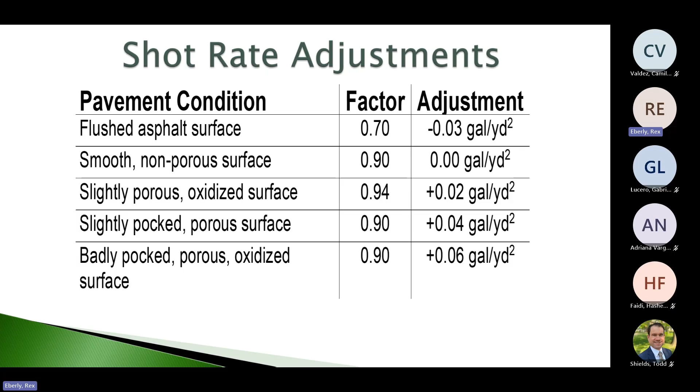That's why it's really important for that supervisor, and if you have an inspector, to really be driving ahead and looking at the road closely to make sure that the application rate we're spraying is the right application rate.

So the spreader checklist is a lot easier. I mean, they're computerized as well. They're a little more self-contained. Again, the reason we have that chip spreader and why we need to go through it is we need uniform aggregate application, because it's got the same type of computer and it only knows what it thinks is being applied.

And if the gates aren't correct, if things aren't correct, then it may be applying too much here and not enough on this part of the lane, and you're going to have embedment issues. So again, we need to calibrate that and ensure consistent discharge.

We need to make sure the hopper's clean and free of debris and clogs. I think you've seen this with wrap. You can also see it if we've got dirty chips that are too wet. They'll start to clog up in those gates, and the gates either won't close or you don't have as much volume going through the gates as you think. So that's really important.

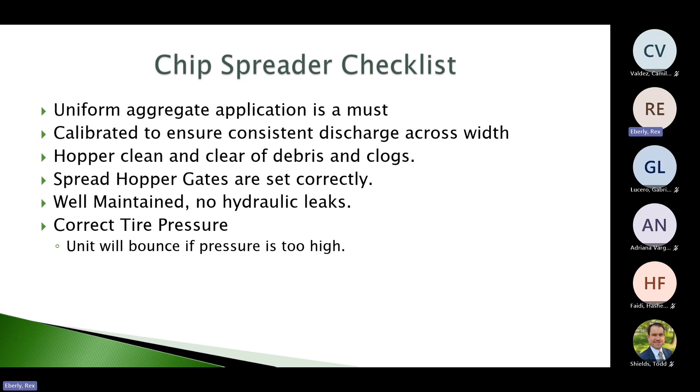Those hopper gates can come out of adjustment. They all need to be set so that they open at the same time, close correctly at the same time and at the same amount. No hydraulic leaks, correct tire pressure - we don't want that unit to bounce, things like that.

So calibration of the chipper is pretty easy. Your Etnyre should have come with some canvas squares that are a known area - I think a square yard exactly. So you run your chipper over, set the computer at what you're chipping, and measure it with your fish scale. It's the easiest calibration in the business.

And then there are ways to go into the computer to make adjustments. I don't know with the wrap as much, but I'll tell you that the Etnyre guys, when they program those computers and you put in a 3/8 inch chip - and believe me, a 3/8 inch chip is different all around the country - that chipper is usually right on. It's pretty amazing how they did that.

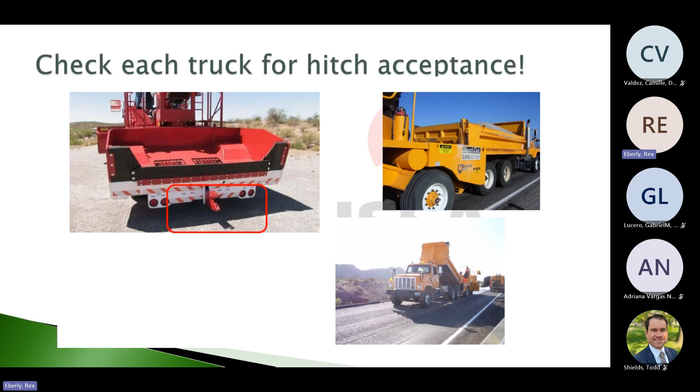I tell inspectors especially, it doesn't matter what that gradation was when it left the quarry. If you've got a softer rock that leaves the quarry at 1.5% -200, and it travels 100 miles to the job in the back of the truck, it gets dumped, and then the loader picks up that pile and bucks up that pile and makes a big tall pile and drives up on the pile with the loader, and then reloads the truck, and it gets out to the job - that 1.5% fines might be 2.5%, might be 3%. So we really need to make sure where the fines are before we put the rock on the road.

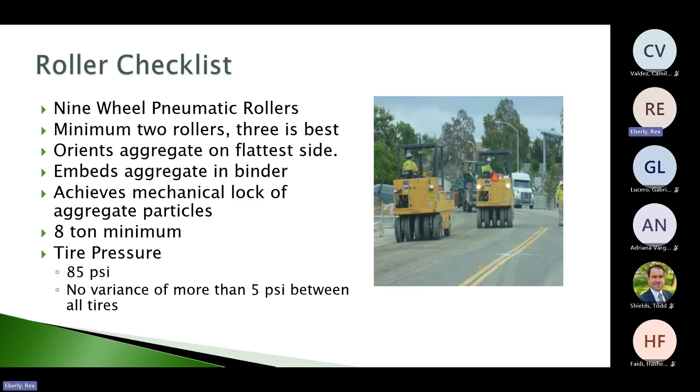And then other areas, we're going to be crushing rock. So that's important. If our tire pressure is all over the board, then we're not going to be putting as much pressure on a section of rock, and we may not be getting enough embedment there by the mechanical lock and orienting that aggregate. So more than the actual 85 PSI, if we're at 80, that's great—let's be 80 all the way across, or let's be 90 all the way across. But we need to check that. That's important with the rollers.

Rex, if I can interrupt here. I think it's important to note that in New Mexico, at least we observed this and asked the different districts, they do use the steel roller. But they use both—they're using the pneumatic roller and the steel wheel roller. I don't know if you want to add anything more on that, but that gets to be quite the argument.

Maybe your aggregates will handle that. Other places in the country have tried it and had failures. I think more than crushing aggregate, I'm more worried that you're bridging over a rut and not getting the right embedment in your rut. This is one of those local things some folks do. It was determined not to put it in as best practices, but best practices are nationwide, and if it works for the state of New Mexico and continually works for them, I'm not going to tell you to stop. I'll just tell you, in most parts of the country, it doesn't work very well.

And I look forward to, if you guys use it, coming out and seeing the difference. And I'd point out too, remember on this job, especially toward the northern end, we've got some pretty decent rutting.

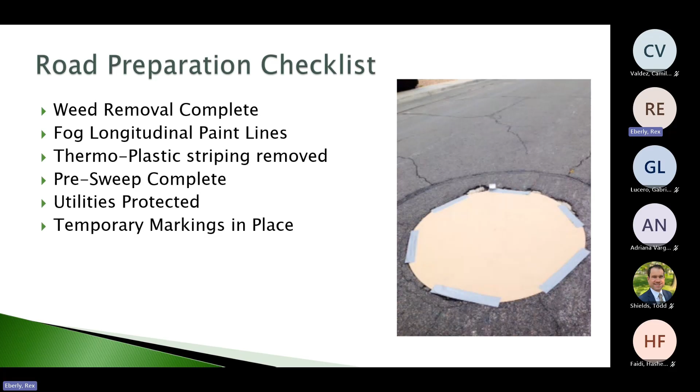Application strategies—we've talked about the road preparation, we're not going to go back into that anymore. Traffic—now this is different with your high float emulsion, so I'll be interested to see how you handle it.

When using a cationic rapid set emulsion, we really like to get, if it's an area where you can put controlled traffic on that chip pretty quick - if we can put 15-mile-an-hour traffic just after the rollers through a pilot car and get some extra embedment on that chip, that really works well. If we can't control the speed, if we can't control the turning, if we're not running a pilot car, if we've got a 4-lane situation, then we need to keep traffic off until that chip is fully embedded and the emulsion is fully cured.

With that high float, depending on how long it remains flexible and how quickly it builds strength, you might need to leave traffic off through your pilot car a little bit longer. So look forward to seeing how that works.

Some folks are lucky - usually DOTs are able to get away with this, they'll just close a 3 mile stretch and do the whole thing and then go down to the next one. I'm not sure how you all get to do it, but traffic is important because traffic can mess up your embedment pretty bad. If there's a lot of turning, if there's a lot of stopping on the fresh chip, then we need to keep folks off of it as much as possible.

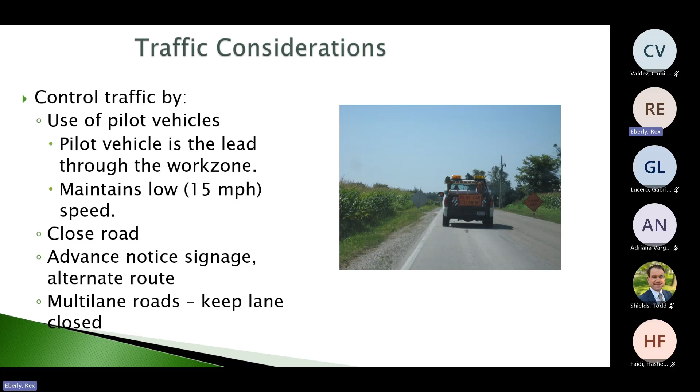I understand that changes because that distributor will have to back up and pick up a truck and then catch back up, but as much as possible - we never want to see that distributor go by and then look back and not even be able to see the chipper. We need that chipper as close as possible to that material.

Now with that high float, that may give you a little bit more leeway there, but even so, we have to get that chip on before that emulsion A has time to break, but B has time to go to the low spot, whether that's the edge of the road or the rut or whatever.

So that chipper is right behind our chip trucks, and again we're staggering those chip trucks. We may or may not have a patch crew to make sure that we don't have any humps of aggregate, like where we loaded a truck, or worse, we don't have any open spaces where our chip didn't drop and we've got open asphalt sitting on top.

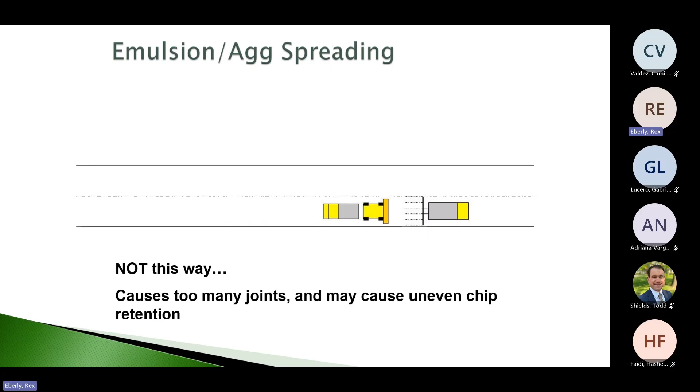Air and ambient temperature - best practices is above 55 degrees with no lower than 40 degrees overnight. I know in some of your high altitude areas that above 40 overnight can get tough. We definitely can't have a freeze though. I like to see the air and ambient temperature closer to 60 to 65, especially in the fall.

Temperatures in the fall are different than temperatures in the spring. I know that doesn't sound like it makes sense, but if you're in the spring and your road and your air are for the most part continually warming as that chip seal cures completely, you're going to have a better job than if you're in the fall and the road and the ambient continue to drop while that chip seal tries to cure. So kind of watch that.

Dry pavement if possible. If you have heavy rain forecast for the next 24 hours, then it's probably a good thing not to chip. Obviously, in our part of the country, if we wait till we get a 24-hour forecast without rain, we're not going to chip very often. So that's just something to watch.

Kind of like we had last night - they've been predicting for a week that we would have heavy rain yesterday through a huge swath of the Midwest, and by God, we had heavy rain. We had 1.5 inches last night. So yesterday afternoon probably would not have been a good day to be chipping, because with that heavy rain overnight, you probably would have lost your chips. So pay attention to weather.

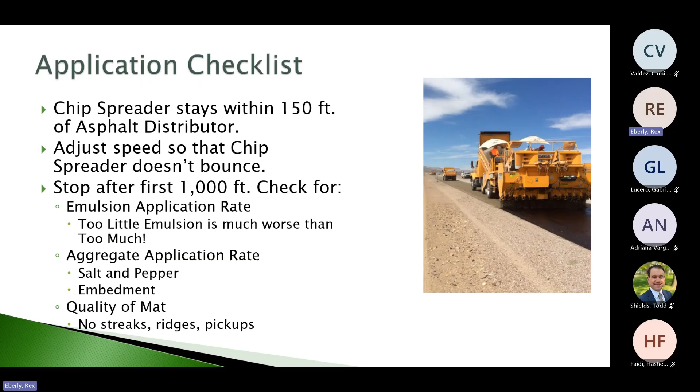We have streaks, ridges, humps, pickups, all that - let's know, because you guys understand this: a chip project moves incredibly fast, and that's a great thing unless you've got a problem that you don't catch, and then you get a lot of miles with a problem that's got to get fixed.

One of the main things I see wrong with chip seals is over application of the aggregate, too much stone. Ideally, we are putting it down one stone thick. Best practice - too much is as bad as not enough.

So we're going to have a gap, and we're going to have free emulsion sitting up there, because that stone on stone, as we rolled it, the trucks went over it, all that stuff causes a dislodge. And probably all of those stones in that area are probably going to lack a little bit of embedment.

We really like to see, of course, when you're using wrap it's a little bit different color, but we like to see a salt and pepper appearance, which means when that stone is dropped, we want to be able to see some emulsion in between the individual aggregate particles. All we see is heavy rock application.

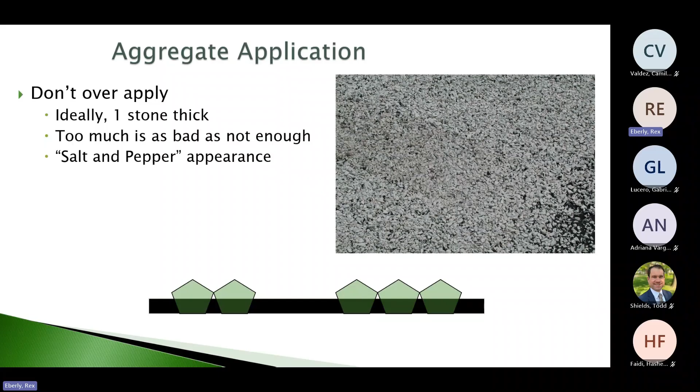And then as we get up towards the top, there's places where there's more chips dropped. But that salt and pepper is really important, to be able to see some of the emulsion in between the aggregate. If it looks like a gravel road, you've got too much.

Here's where our best practice gets in the way of the actuality of being able to make money doing a chip seal. The best practice group put together that they wanted a maximum speed of the rollers at 3 miles per hour.

They say that because if you get much faster than that, you can cause chip loss. You'll actually see rooster tails of aggregate dislodged with the roller.

But as a contractor, I understand that if we have to hold those rollers at 3 mile an hour, if we want them to roll the material within 2 to 5 minutes of application, that they want that first pass, and we want to roll up and back twice with the pneumatic, and then once with your steel, then 3 miles an hour on those pneumatics, you're never going to keep up.

Most of these pneumatic rollers have a top speed of about 8 miles per hour. That's definitely your limit. The main thing is, just like the brooms, is if you're seeing aggregate dislodging behind that roller, it's going too fast.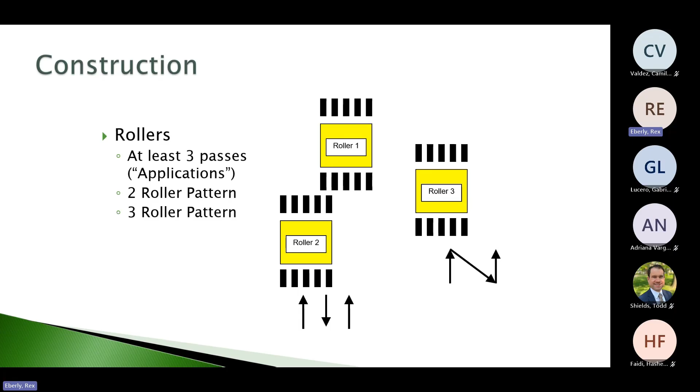So we got the roller pattern up and back twice, pretty basic. 3 roller pattern where the 2s just stay back and forth, and that third one can go like that.

So brooming should start when the emulsion is cured. Again, this is set up for the CRS, usually between 1 and 2 hours after rolling. Light brooming only. Heavy brooming removes excess chips. Excess chips remove other chips. Embedment is lost. Please remember that.

Broom back that center line joint if that's the way, if you keep an open center line joint, and then open to controlled rolling traffic as soon as safely possible.

So just think about what you're doing out there. Think about embedment, whether you're a truck driver, a distributor operator, a flagger, whatever you do out there. If you're speccing the materials, the embedment is what you're out after.

So when that chip has had some traffic to it, you want to make sure that you've got 70% embedment, and hopefully within a year or two, Adriana's going to give you a test method that allows you to do that using the tools that you have in your pickup truck.

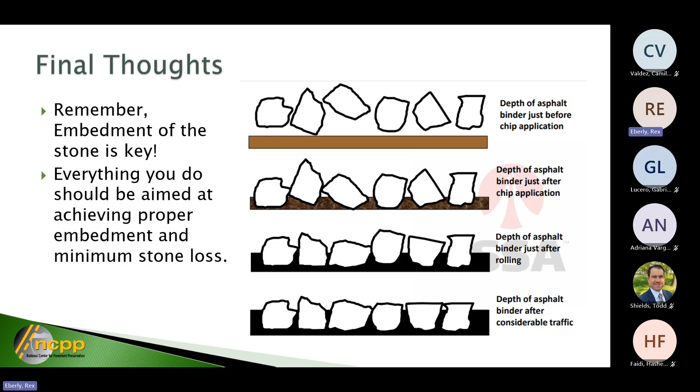So those are the final thoughts on chip seal. I do have a few on fog seal. We'll hit those. I'm really glad that you all fog seal the chip. I think that's really good.

This kind of goes into fog seal. Some folks fog seal a dense graded hot mix as a preservation treatment. We're talking more about a chip seal treatment where we're protecting that asphalt from extra oxidation and moisture intrusion. So it's doing just what it does as a preservation.

We're just doing an early preservation fog seal. It helps lock in the chips. There's anecdotal evidence that it reduces snowplow damage, and that dark surface, especially over a white limestone, helps with snow and ice melt. And obviously that dark surface also highlights traffic markings, and makes the citizens think they got a nice paved road.

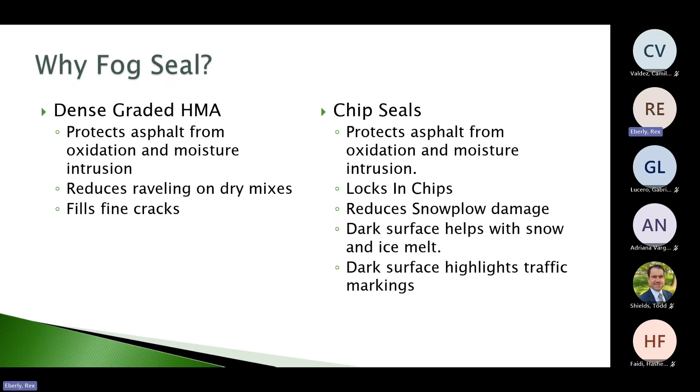Most folks, there are all different types of emulsions that folks fog seal with—CSS1H, SS1H, high float. Not sure if you use high float or not, excuse me.

The non-tracking tack, excuse me, is what I meant. Some folks use CQS slurry emulsion to fog seal, and it's really just what works for you. Normally, we're pre-diluting that to about 27 to 35% residual asphalt.

Your standard chip seal emulsion is probably going to have about 62, 64% residual asphalt. So we're cutting that at about in half.

It's best not to field dilute. It's best to have the manufacturer dilute. It's definitely not good just to drop a hose in the tank and turn it on for a little bit, then drive around the block a couple times and go fog seal. You have no idea what you're applying.

You want to heat that material about 145, 150 prior to application. And again, the distributor best practices are all the same, other than your nozzle is going to be a different size.

I have heard some folks will maintain the same nozzle size but go every other nozzle. They've worked with that, and that gives them a good application. There's some folks that will have the application rate and drive one direction with half a shot, then turn around and drive the other half of the direction coming back with the other half of the shot. They feel that gives them a better coating on both sides of the aggregate.

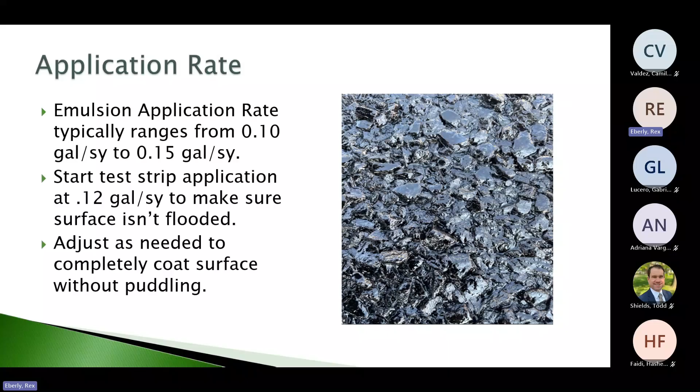It's always best to start at the low end of your desired shot rate and work your way up. Don't over apply and then have to work your way down. You might leave a mess if you do that. You want to adjust so you've got a completely coated surface without puddling. Every square millimeter of that aggregate should be coated, but we don't need extra emulsion down in between.

We don't want it to come up more than a third of the exposed aggregate is what we're shooting for. Again, the best practices are about the same.

Obviously, sweep the roadway ahead of a fog seal, especially if you're doing hot HMA. Obviously, you've probably swept your chip seal. You've got to cover your manholes. You got to make sure you've got your temporary striping ready to go.

Start with that 500-foot test. Check that application rate. Make sure your nozzles are good. Spray bar height is good. You get a good solid application.

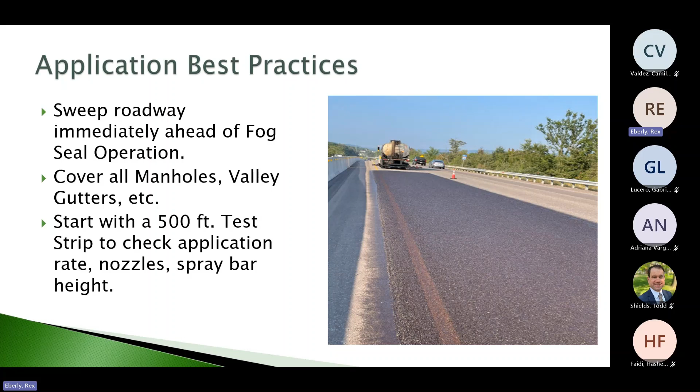Usually minimum cure time on a normal day is about 30 minutes, but that might extend due to cloudy conditions, high humidity, application rate, all sorts of stuff. But there's a nice looking fog seal.

Usually your troubleshooting comes down to bar height, nozzles clogged, or pump pressure, and it really sometimes takes a little bit of adjustment. I would always start with nozzles, then go to bar height, and if I still have it, then I'd start looking at my pump pressures and things like that.

So, questions, comments on chip and fog seal?

All right. Well, let's talk about the PG3 test process that we're doing. We kind of covered some of this, but again, this is a pooled funds study, and we're trying to help all states learn how to get better at applying pavement preservation.

So some of the states are picking things that they've never done. Other states are picking things that they do, but they've had issues with, so where they maybe wanted to make specification changes. And so here they can make a spec change, do a test project, and then see how it compares to what they've normally been getting.

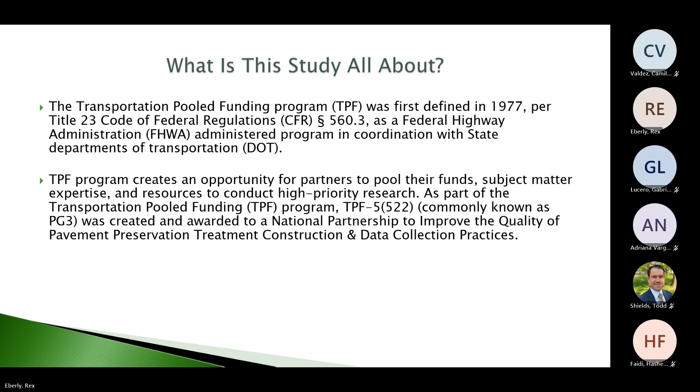So we've kind of hit all this. So what we'd like is on your project, there should be a test location figured out ahead of time so that we know when and where to be there. The test section itself is only 500 foot long, but that can be flexible somewhat.

And what I mean by that is, like if you've laid out you want your test section here and you've laid it out, well, we really don't want to switch distributors in the middle of that 500-foot section. So we may slide that back and forth because of that, or it could be the 500-foot we picked has got some rutting that we didn't think about. So there's nothing hard and fast immediately.

The day of the run, we can slide whatever that test strip needs to be, so that we get a good process. It's important, if we can be there, to have either myself or probably Todd on site the day that you do the test strip.

We ask that we get about 14 days notice of anticipated start so we can start preparing. Then we'll get a 5-day schedule review, so we have a better idea when I need to leave. And then we really want a kind of 48-hour go, no-go.

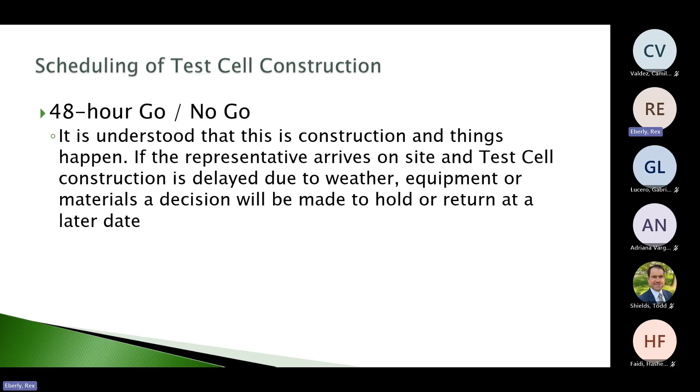Other than that, we don't have to know exactly what day. If you want to start the job on Monday, that's great, let's just make that the day, as long as the test cell is somewhere in the second day's run.

We like if it's weekday daytime hours, we haven't had to worry about that. We'll kind of look at your test cell area just to make sure, and we've done that. We know there's some rutting in places. When I get out there and see something like an excessive amount of oxidation where you want to test, I might suggest we move it to a different location.

What we're really there to do is take a look and get an idea of the equipment. We want to look at the models of the equipment, the types of equipment, does it meet best practice. And all this is going to go into a database.

A report will come together, and we're going to do multiple chip seal projects and look at all of them and go, well, 90% of the people had this distributor set up this way, but this group had it set up differently, and actually their chip seal was better. So we need to go look at that.

Or we find out that these people never calibrated their chip spreader and we had a failure. That means we know calibration is vital, and that helps us know calibration is vitally important, and we'll put that in the report.

So if I'm out there, I'll want access to your equipment in the morning. I'll just look at the rollers, look at the brooms, take a walk around the chipper. Other than that, once you all get chipping, we are not there to get in your way at all.

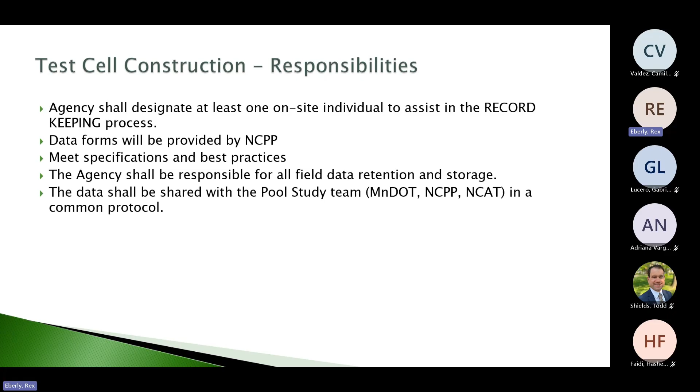Todd will get you the data forms, I've got some samples coming up here. We want you to meet whatever best practices and specifications you have, and hopefully they meet our best practices. And then you all are responsible for field data retention and storage, and the data sharing with the pool study team. Somebody else can talk about that if you have questions.

So there's two forums. Again, our responsibilities are equipment review, material and stockpile review, discussion of best practices with the crew and the inspectors. We'll assist you with data collection, and I'll do a completed after-action review of the test cell construction.

And then the contractor. You all are just required to provide access to the equipment for me, employees, and materials. Again, I do not direct your employees, but I may want to talk to them about something I saw, like asking how come you did that.

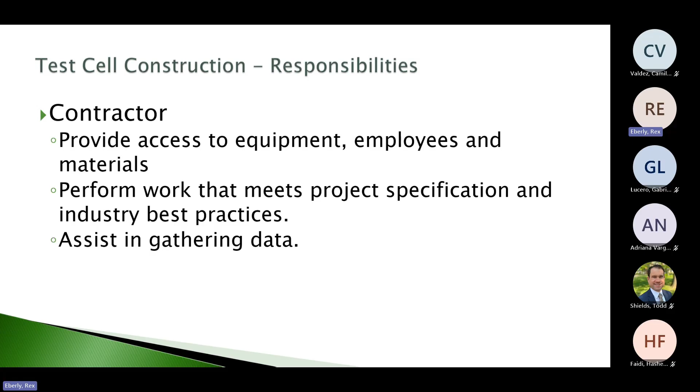Well, that's the way I've always done it. Okay, perform work that meets the project specification and industry best practices, and assist in gathering data. So I might need some help from your distributor operator to tell me how you got the computer set, stuff like that. We may have some industry volunteers there. I doubt it where this project is, but sometimes we have had folks from FP2 or other folks come in and help take photos and videos, and hopefully they'll go out and review the project after it's complete.

I don't have a map of the test cell layout, and I've had a little trouble finding the exact location on a map. So if I could get a little more detailed information sent to me, that would be helpful.

I think we're south of 40, south of Santa Rosa. Is that correct? Yes, and we had selected that through Adriana and everything. It's at mile marker 1.2.

And that's going to be coming from 54? From 54 towards I-40. At 54, mile marker 0 starts there, which would be BOP, where the project starts, and then mile marker 1.2 going north would be where the test cell starts.

Boy, I've been down there. There's a whole lot of nothing down there. Yeah, there's a whole lot of nothing. You get to see the blue hole though. Oh, okay, all right. So, boy, there was an old guy down there somewhere that had a roadside stand that made the best jalapeno stuffed olives. I wonder if he's still down there. Anyway, that was a long time ago. He was 90 years old then.

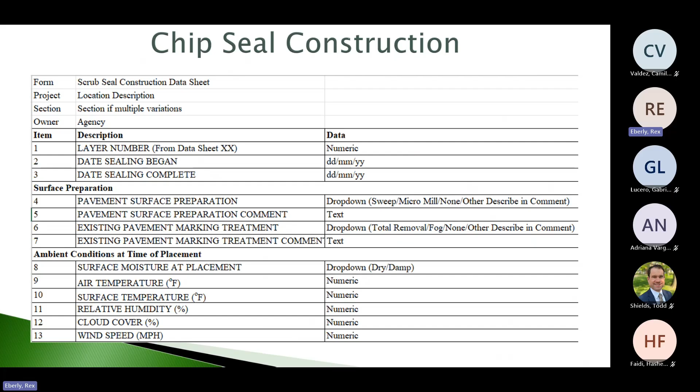On the day of construction, there's a little bit of data here, but we're going to note how you guys prepare the surface. Well, we swept it, okay great. If you micro milled, if you had to wash it, whatever, we just write that down. Any comments on the existing pavement marking, what you did to those markings if anything. We'll check surface moisture, air and surface temperature, humidity, all that, just to get some ideas of what's going on.

I'll take note of how many distributors you're using, how many tankers, your support equipment, how many brooms, what kind of brooms, how many rollers, what kind of rollers. I'll take photos of everything. We'll take a look at your distributor, the nozzle angles, and see if they're where they should be. Take a look at that spray bar height, we'll measure it just to see where it is, nozzle spacing, all sorts of things. We'll do the same with the rollers, same with the brooms. We'll try and do this all in the morning before you get going, or at the end of the day when you're all done, so we're not slowing anybody down.

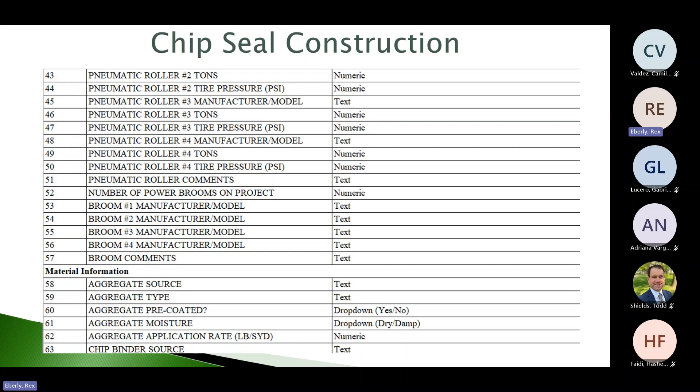So we'll check application rate, emulsion rate on the test cell itself, or as close as we can get.

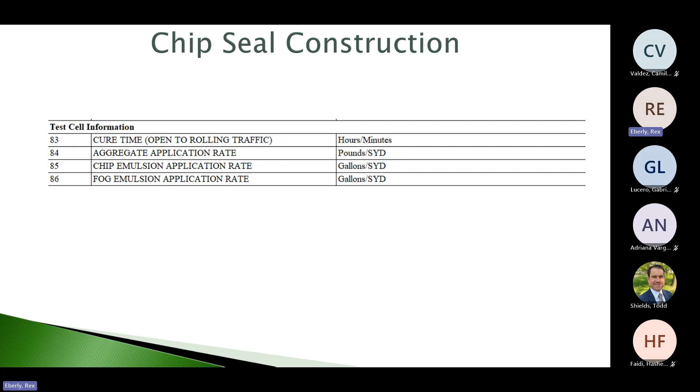Cure time, when's it open to rolling traffic? When are we gonna broom it? I think in this case, I hope to come back the next morning when we broom. I think I will plan on doing that. I love mornings in the desert, so that's okay.

That's just kind of the things we're looking for. Hopefully your crew knows I'm there because I'm out asking questions, but I don't get in the way. We take some time to get data, there's someone there I can work with to do that. We'll watch you guys work and have a little fun. If I can see anything that might help you, we'll try it out, and if I can learn anything that'll help somebody else, we'll try that out too. So, unless I've got the go ahead...

I've got the email here ready to go with that form. Josh, I'll send it to you and Gabrielle, and then you guys can call me with any questions, or if we want to jump on a Teams call and go through it. But it's not that intimidating. No, yeah, that's totally fine, I'll be waiting for it.

Tell me again, what road are we doing? 219. Yeah, logistically, it's about an hour and a half from Albuquerque, so it's not terrible. It's off of 54 heading up to 40, between 40 and 54. So that looks like about a 15 or 20 mile one way.

So are you guys looking to chip that one week and then come back and fog seal it the next week? I know you said you had two weeks scheduled for it. Yeah, we're gonna chip seal it, then fog seal it. Okay.